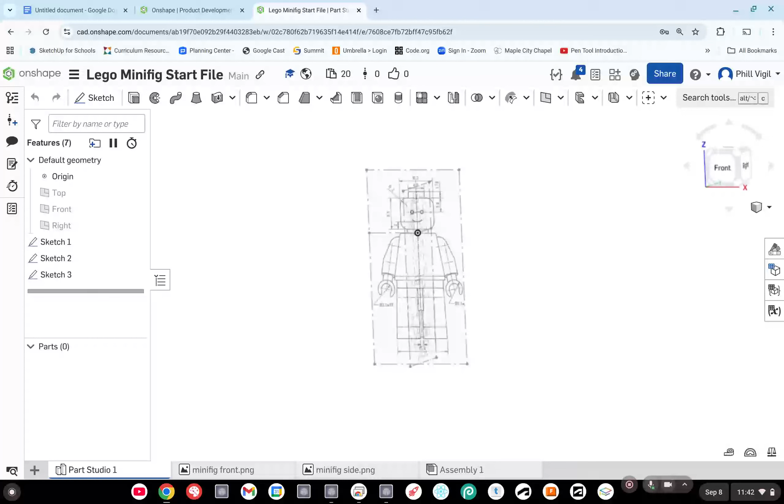Alright, so getting started with this, we're going to be modeling just the head of this Lego minifig. So this is the start file. You'll want to make a copy of this so you can edit it. So you're going to go here and click copy. Let's do copy 2 because I've done this before. And you need to choose a location to copy it to, so you may have probably just owned by me as an option.

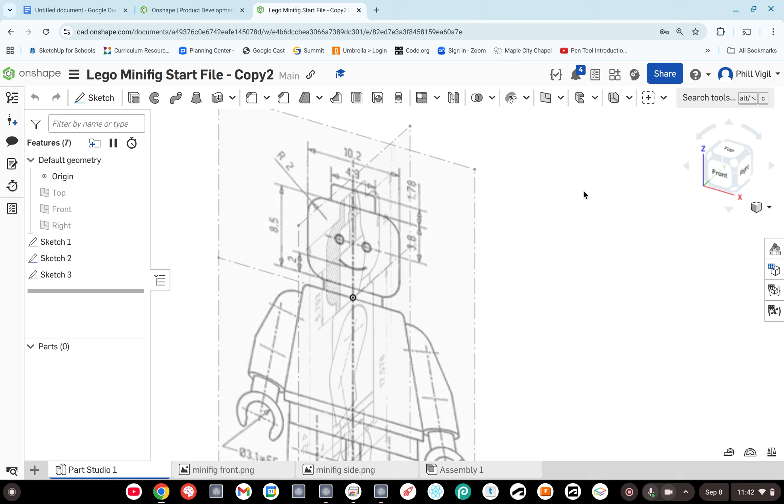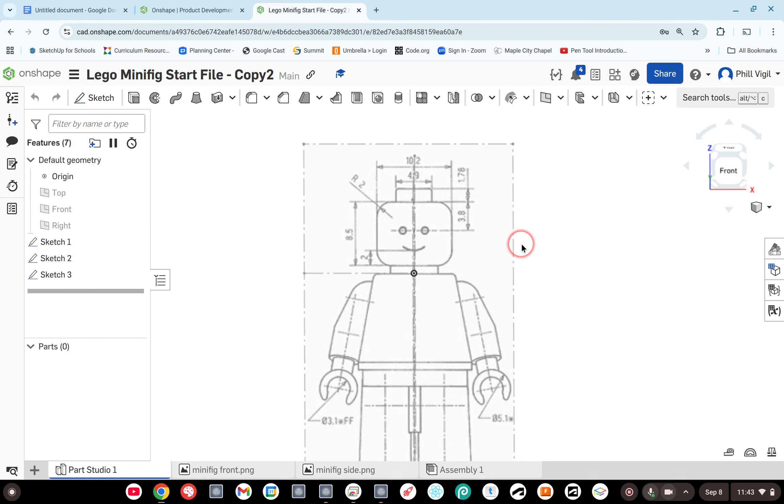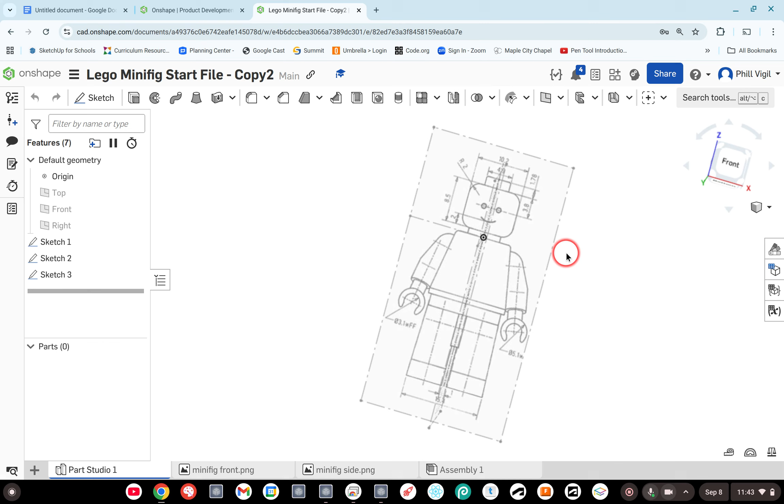So our goal is to model the head complete with a smile and two eyes here. So to get started, just to see what's going on, we have a diagram which is two images, one that has a facing forward minifig and then the side view, and I know that the side view is flipped, so don't worry about that. It's the only way I could import it. But we're going to use those for some measurements, and it is to scale, so as we make lines we can see that it pretty much matches up with the drawing space.

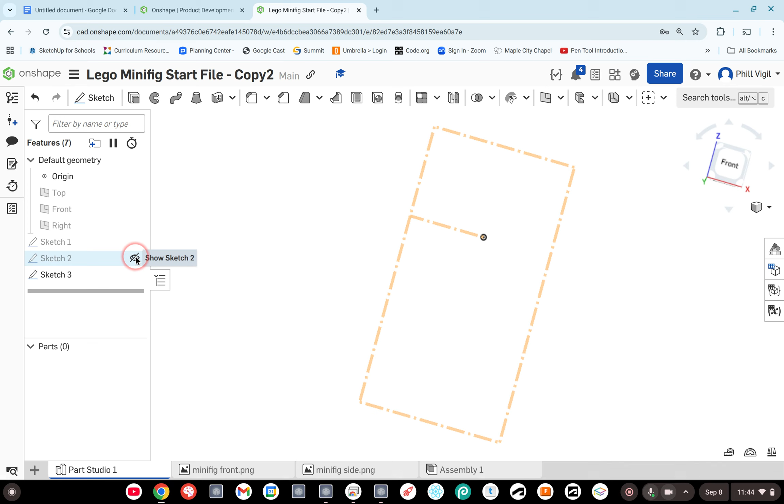So let's get started. So we're going to start on the front plane. We're going to create a sketch. So we already have a sketch in here that's extra that has nothing on it, sketch 3. Sketch 1 and sketch 2 have the images for the diagrams. So if you ever need to hide those, it's sketch 1 and sketch 2. Sketch 3 I just happen to include, which is blank, so I'm going to go ahead and double click on that. And it is set to sketch on the front plane, which is what we want.

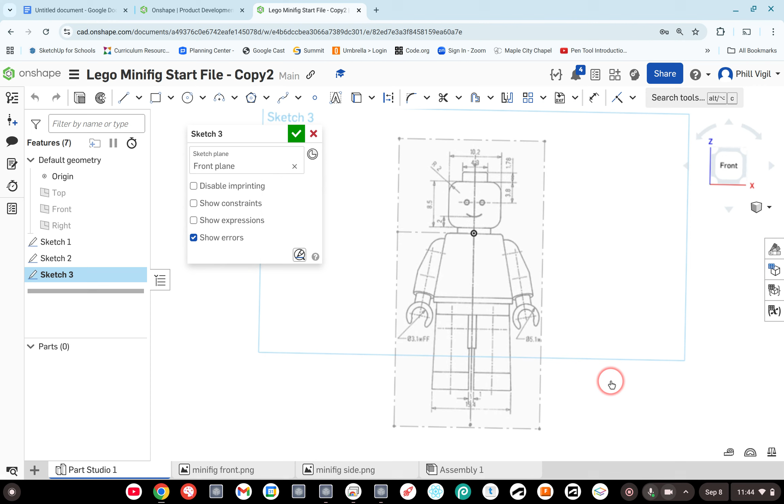So we're going to sketch on the front plane. I'm going to right click my view, my area here, and then select view normal to sketch plane. That's going to rotate it straight on there. And now we're ready to sketch.

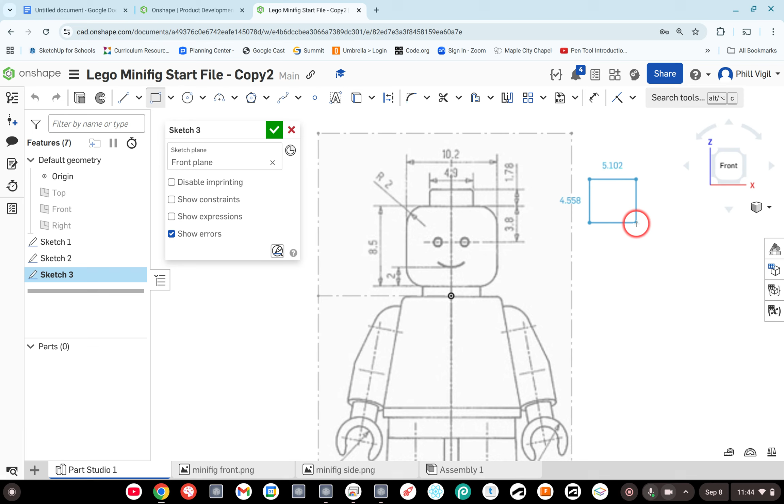So you can see from the diagram we have a basic rounded rectangle shape, and the measurements for that are 8.5 and 10.2. So I'm just going to quickly go through this. If you need to pause or rewind to get caught up, you can. But to get started, we're going to use this rectangle tool, and we're just going to click over here somewhere random, make a rectangle, and the next thing we're going to do is dimension it according to the measurements we have here. So, okay, one final tip.

If you create your rectangle, let me just show you the wrong thing to do. So in Onshape, there's tons of constraints. You can have a constraint and not even know about it, like if it's horizontally aligned with this point of origin, and you just click randomly to create your rectangle. Let's just say this is what happens, and then you go to dimension it. This is going to be fine here, 8.5, yada yada. And then the top is 10.2.

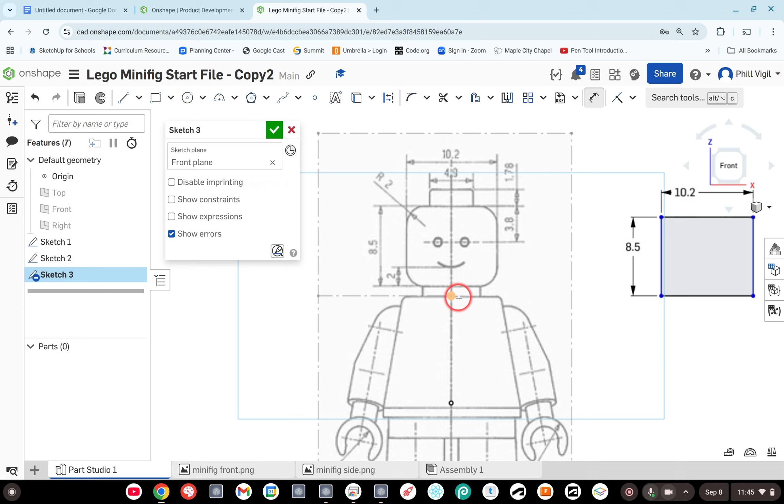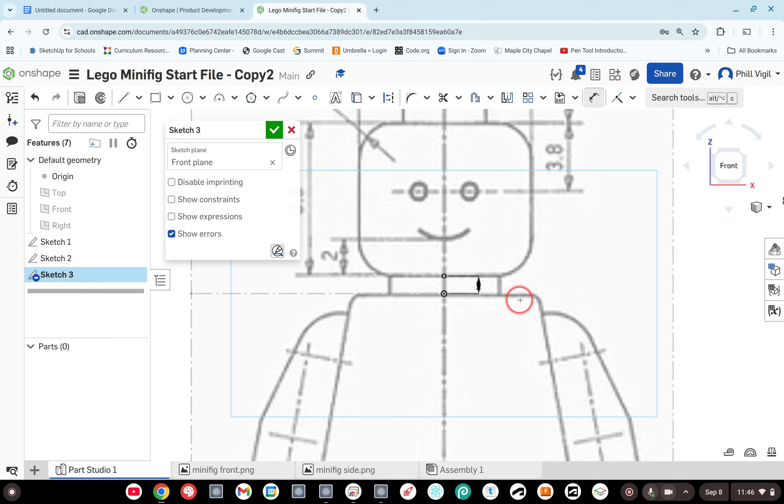And then I want to attach it here somewhere. So I'm going to need to make a point. That's the next part. And I want it to be right here. So I just create a little point there. Then I'm going to distance that. I'm going to measure the distance. Click from there to there. And this is going to be exactly 1 millimeter away. Okay, so this is going to be an anchor point for my rectangle.

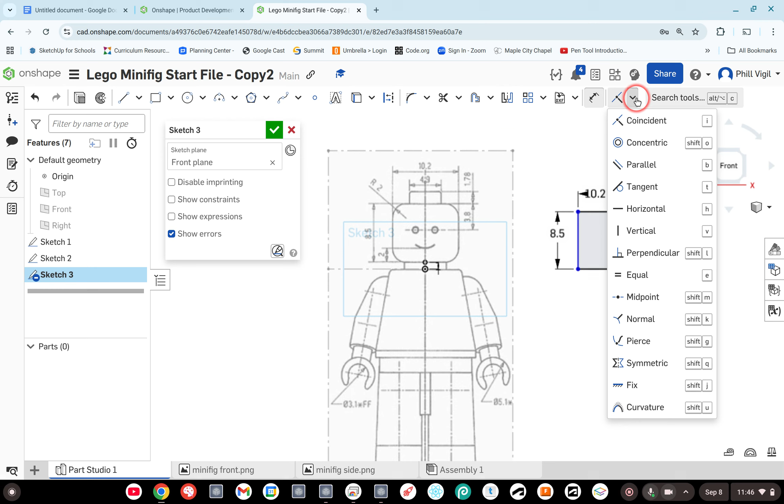And then let me show you what can happen if you accidentally add a constraint that you weren't aware of. So what I want to do next is I'm going to use the midpoint constraint. And if you have a larger screen, you may be seeing expanded tools. So these are actually up here somewhere. If not, just find the one that says coincident. That's one of your constraints. Click on the arrow next to it and you should be able to see this list of constraints. The one we're looking for is midpoint.

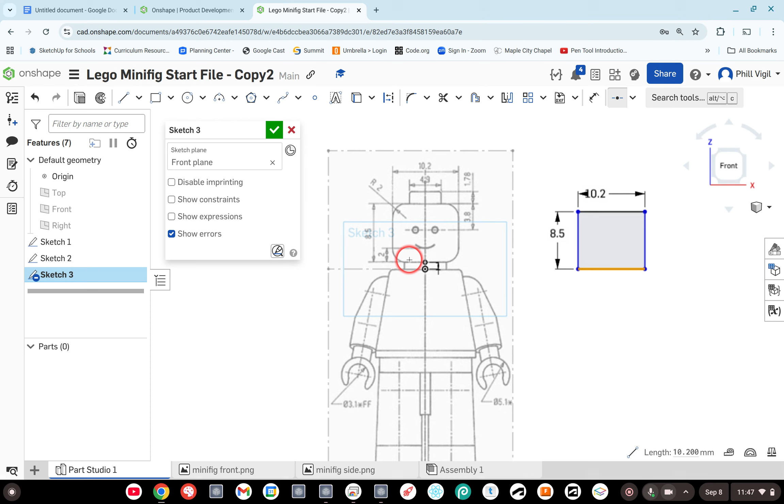So I'm going to click on that and then select the line, the bottom line. I want the midpoint of this line to be attached right here. So that would align our rectangle with the drawing. So when I click here, it's going to have an issue. It's because when I originally drew this, I referenced the point of origin.

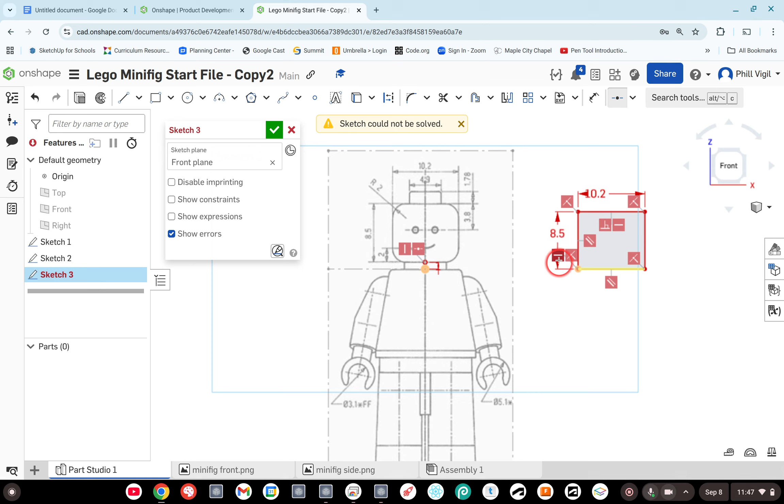And so this is now horizontally constrained, which means it cannot move up. It can't move here. And that's because it has this constraint. When I hold my mouse over it, you can see this dot lights up yellow, and then the line also turns yellow, which means those are the two elements that are horizontally constrained. So I can solve this problem by removing that constraint. So I'm going to click on it.

It doesn't really highlight very well, but it is selected, and I'm going to press backspace on my keyboard. Now that that constraint is gone, it is able to move where I want it to move. So if that happens in the future, if you get all that alarming red stuff happening, it's 99% of the time related to a constraint that you didn't know that you applied.

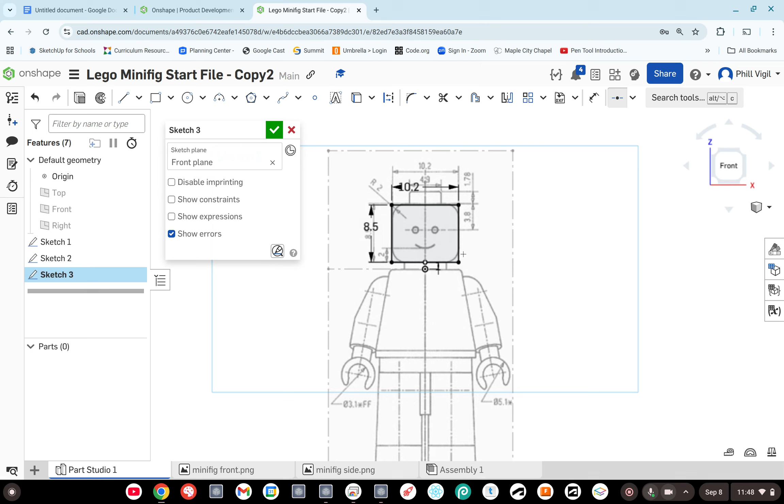So something is stuck together, like it's either tangent or parallel or vertical or horizontally aligned, and so you can't move it. So that just takes some practice getting to know how to avoid that and also how to fix it if it does happen. So if it happens to you, feel free to reach out with any questions. So now we're ready to move on. That took a long time to explain.

Next, we're going to round the rectangle angles here, and we can see the radius is 2. So for this, we're going to use this tool called the Fillet tool. And to use this tool, there's multiple ways. You could either click on corners to round them, or you can select 2 lines that are connected by a corner. So to me, it's easier to just click on the corner where they're attached.

It will immediately start to fillet that corner, and the measurement, you have to play around with this to see it change. So if I grab the arrow here and adjust it in and out, you can see there's a value that's changing. So for now, I'm just going to eyeball it so I can select the other corners. Whoops, I just clicked too many times. You can always go back in and do more corners if you want to, but it's easier if you do all of them at the same time. So let me go ahead and undo that step.

Grab the Fillet tool, and what you want to do is start selecting corners. Again, if you do this and only do one corner at a time, you can do that. You just have to set the measurement once, and that should duplicate the same setting with every other corner. See, I have 1.931 there. So I'm going to go ahead and click the next step.

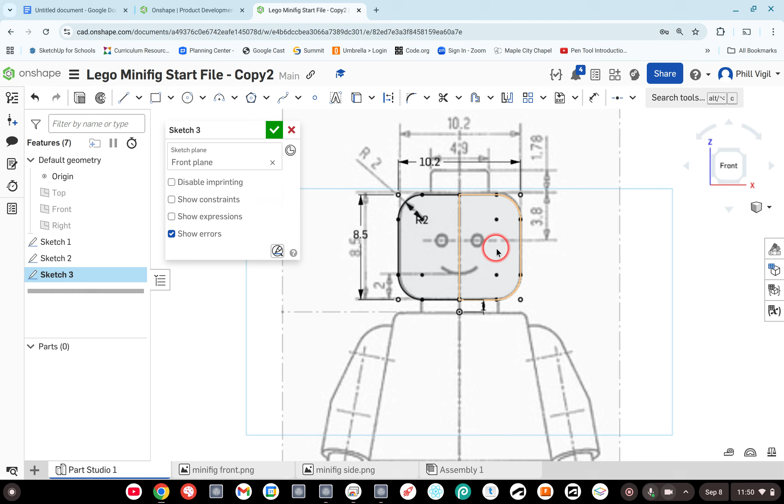So we're ready now to do the next step, which is we need to divide our space in half. So we're going to grab the line tool. This needs to be a real line, not a construction line. So I'm going to click at the bottom here and then draw a vertical line until it meets the top. It's going to divide my face in half. So now I'm ready to create my first part. So I'm going to click the check mark.

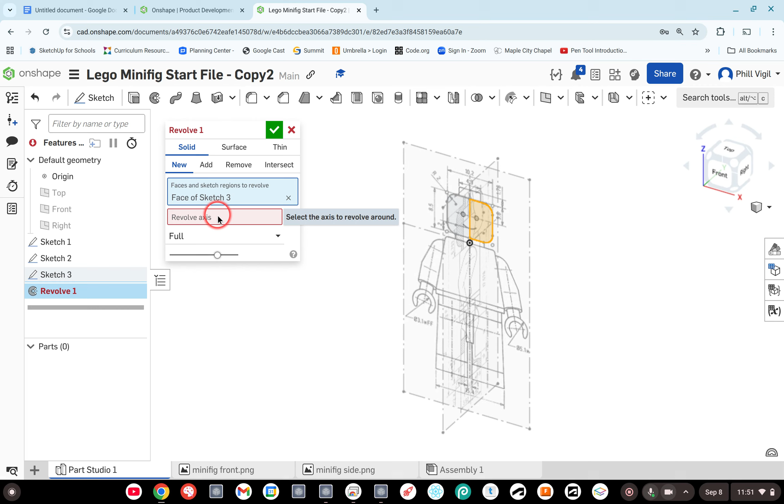And then to do this, we're going to use the Revolve tool. So I'm going to click on the Revolve tool, and then this box appears, and the first thing it wants is the faces or sketch regions to revolve. So you want to click on either half, doesn't matter. Click on the half. Then it needs to know the revolve axis. So what's going to happen is it's going to revolve this around this center axis.

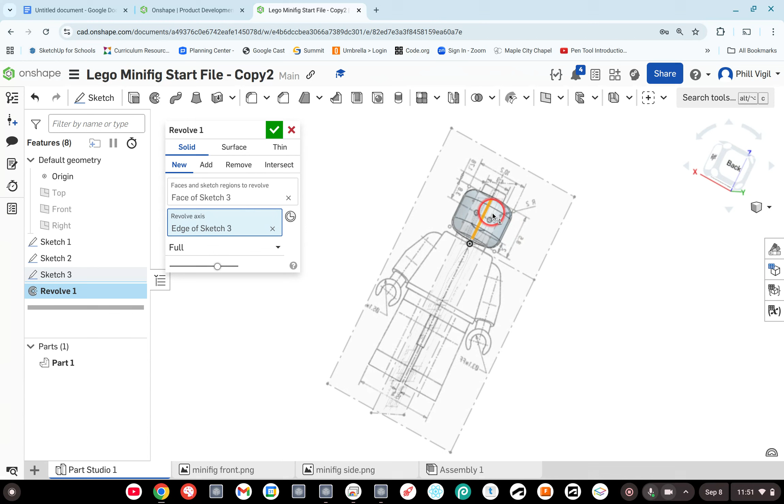So I'm going to go ahead and click in this reddish box there. Now I can select the revolve axis, which is the center line that we just created. And that should create the general shape of the head. Go ahead and click the check mark. And the next thing we're going to do is model the little nub at the top. That is a 4.9 millimeter circle.

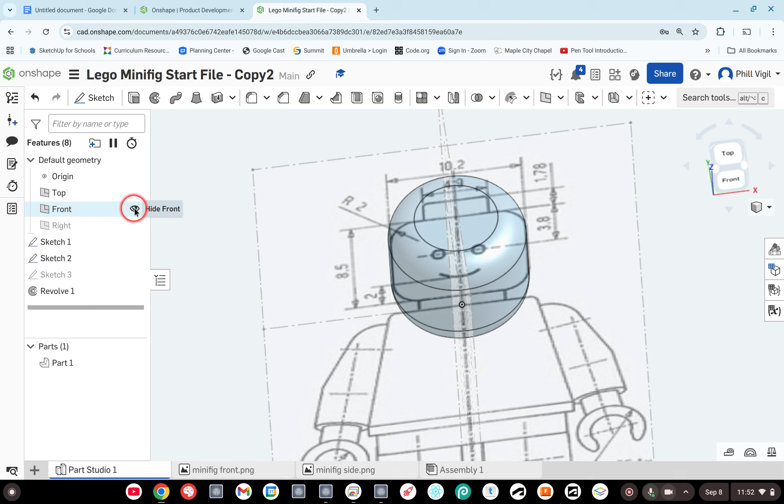So I'm just going to go ahead and hide the 2 sketches here so they're not confusing. Whoops, I just revealed the planes. Hide the sketches. So again, that was a 4.9 millimeter. So I'm going to view from the top now. Get a sketch. Make sure I'm sketching on the top of the head. So I'm going to just orbit to make sure that's on the top of the head. Yes, it is. And then we're ready to draw our circle.

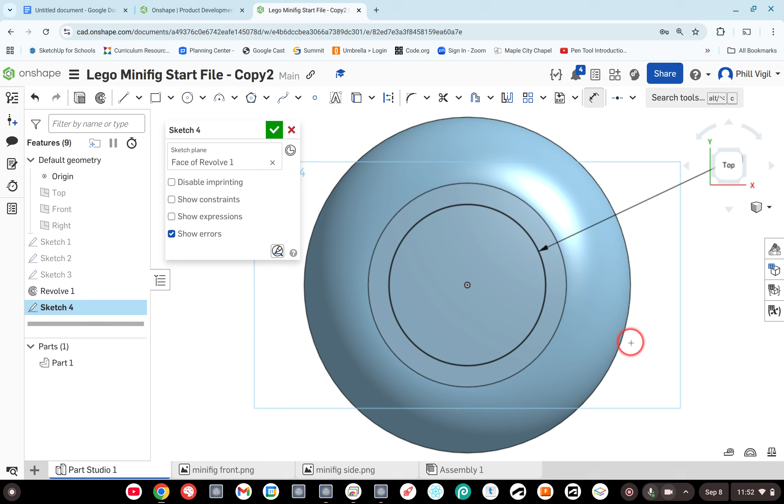So make sure you reference this point, which is referencing the point of origin, which is the center point. I'm going to click there, and then just click a random spot. Then we're going to dimension this to be specific. 4.9 millimeters, 4.9. Enter. Okay, now we're ready to extrude this. So go ahead and click the check mark.

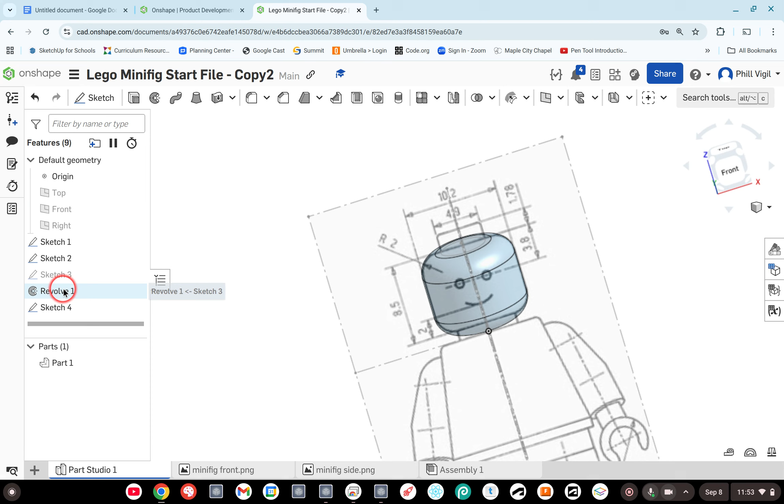And then we'll go into the sketch to see what the dimension is. I forget, so let's go ahead and orbit so we can see. 1.78. That's this measurement here. 1.78 is what we want. So go ahead and go into the extrude option. Click on your little circle there in the top. And then type in for the depth 1.78.

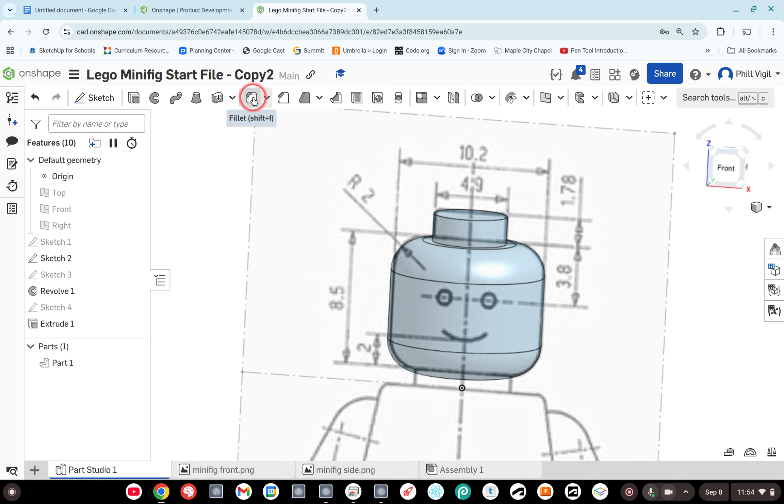All right, the next thing that we did in class, just a little something extra here. Let me hide this sketch. You can see if you zoom in here, the top of this is kind of like a beveled edge. It's got a rounded edge there. So we're just going to try to make that as realistic as we can. So we're going to use, in the 3D modeling tools, there's a fillet tool. Let's go ahead and find that.

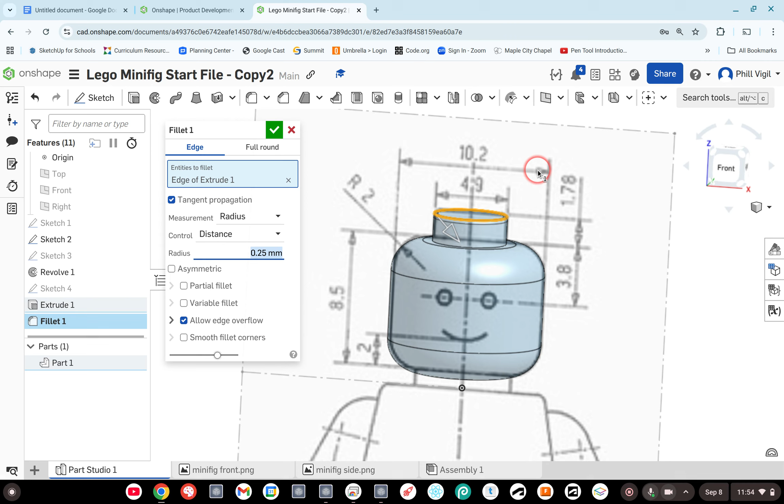And if I click this right now, it's going to remove the entire corner because the radius is 2 millimeters and my height is only 1.78. So it's basically taking the entire corner off. So we want to change this radius to something very small, like 0.25. So then we have a nice rounded edge there, and then click the check mark. All right, that's looking like our drawing.

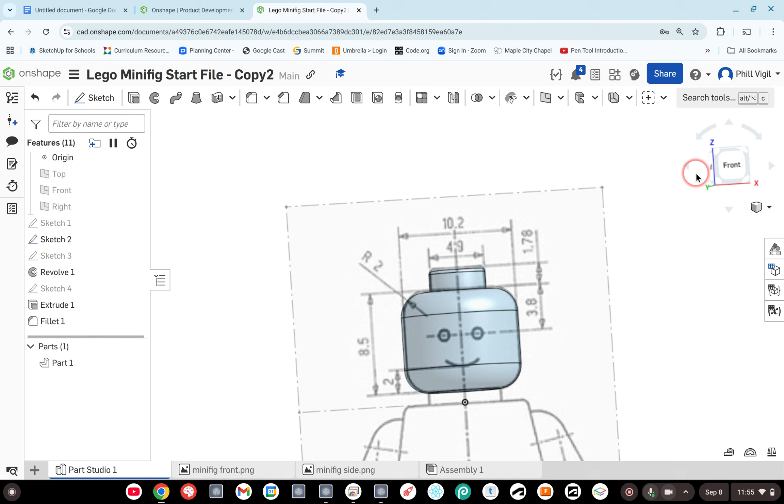Next, we're going to model the neck and make a hole for it to attach to a body. So the neck measurements aren't provided. There's no dimensions here, so we're going to use the line tool to get a general gist of what we're doing here. So let's go ahead and create a sketch. We're going to do it on the front plane, and if you want to, you could just watch this part. You don't have to really do it, but actually, let me just get out of this sketch. Sorry, it's a little confusing, but I only needed to reference the drawings.

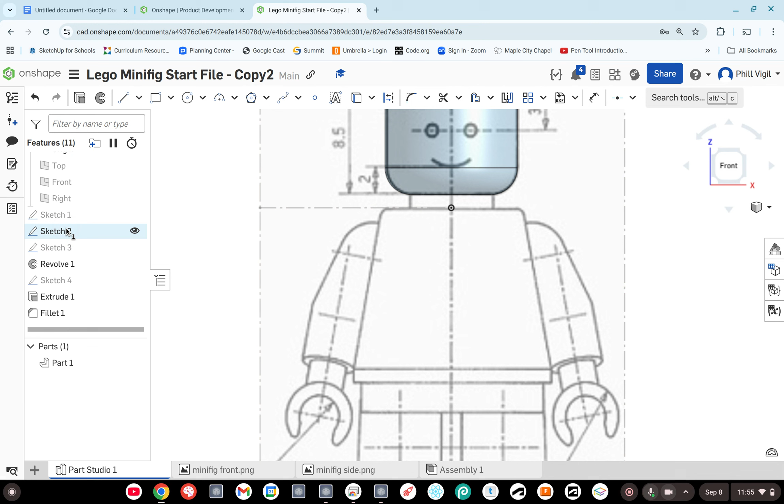I'm going to go into sketch 2 and just make a couple measurements here. All right, so what I need to know is the distance between the head and the body. So I'm going to go ahead and just grab a line tool and just measure real quick. Looks like it's about, oh yeah, it's 1 millimeter. That's what we had, the distance between here and there. So that's 1 millimeter. Let's just measure across here. We use a different line. Sorry, I'm just actively thinking in this video, so sorry you have to go through this process with me.

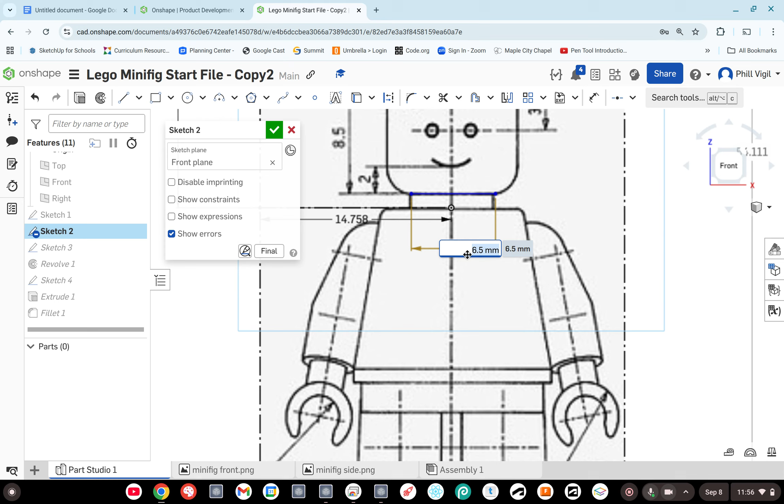So go ahead and click there and measure across to that side. Then we'll get the dimension tool just to see what we're working with. It says 6.33547. So let's do 6.5, or 6. Let's see what 6 looks like. It's a little small, so let's do 6.5. That looks a little large. Let's do 6.25. Okay, let's try that. All right, now we've got a measurement.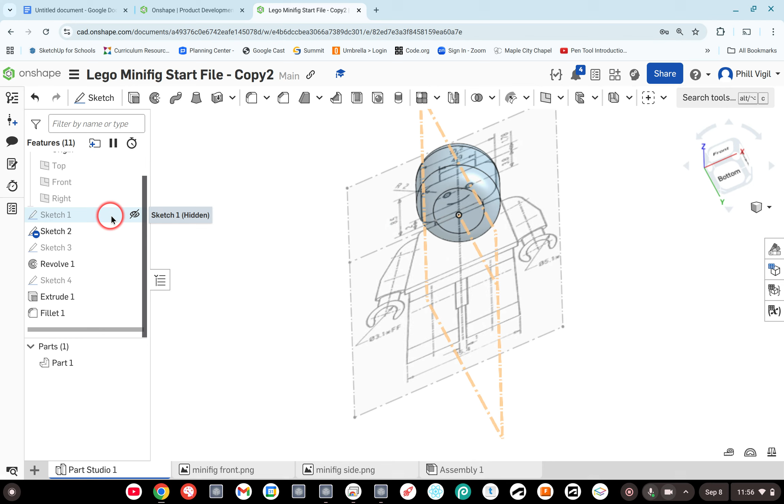We have a depth of 1 millimeter and a diameter of 6.25. So keep those things in mind. 6.25 is a hard one to remember. Go ahead and accept the sketch. Now let's orbit so we can see the bottom here. I'm going to go ahead and hide this sketch here. And then we're going to create a circle. So we need a sketch on the bottom. So we're on the underneath part of the head. Click on that to place your sketch.

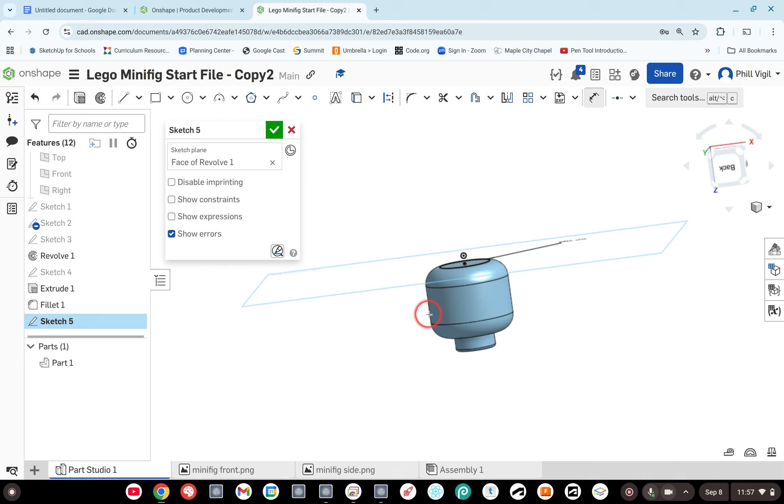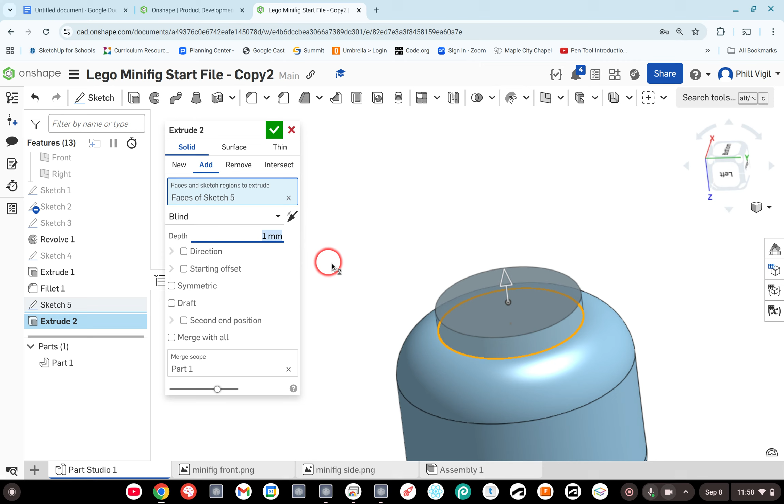Then we're going to sketch a circle. I'm going to orbit so I can see that I'm connecting it to the right spot. And then dimension this. It's supposed to be 6.25. I just wanted to see if that's sticking out beyond that curve area, but it doesn't look like it is. That looks almost perfect. Okay. We're going to leave it like that, and then we need to extrude this. And the depth is 1 millimeter. So we've got the basic shape here.

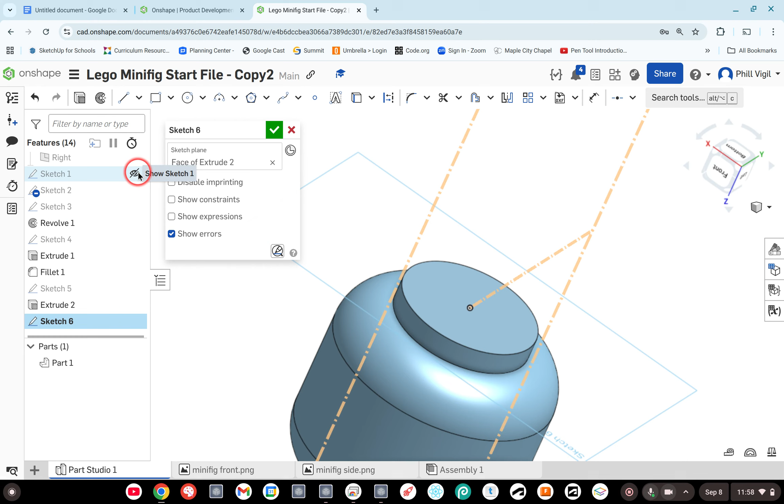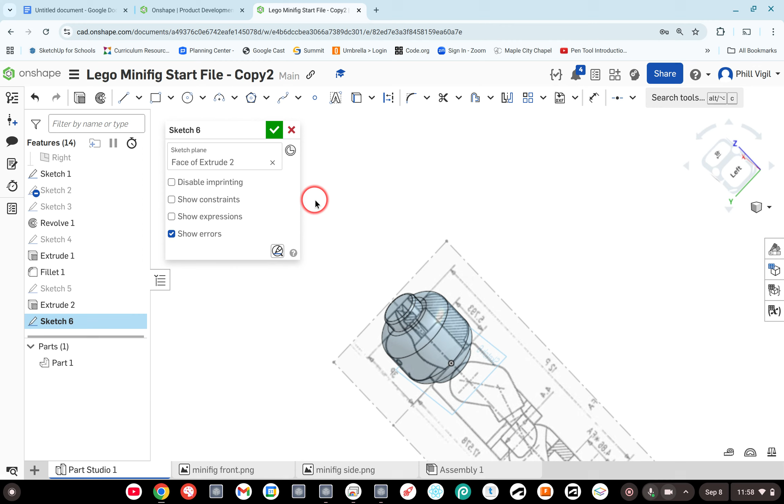Click the check mark. Now we need to make another circle, so I'm going to sketch on this plane. And let's see. The hole on the sketch 1, if you see, almost all of the holes that you see are this 4.86 measurement. You see that there, where there would be a hole, and down here, 4.86. So I'm just going to use that measurement for now, and it may need to be adjusted later, but we're going to use that 4.86. Let's just round it to 4.8. That's easier to remember.

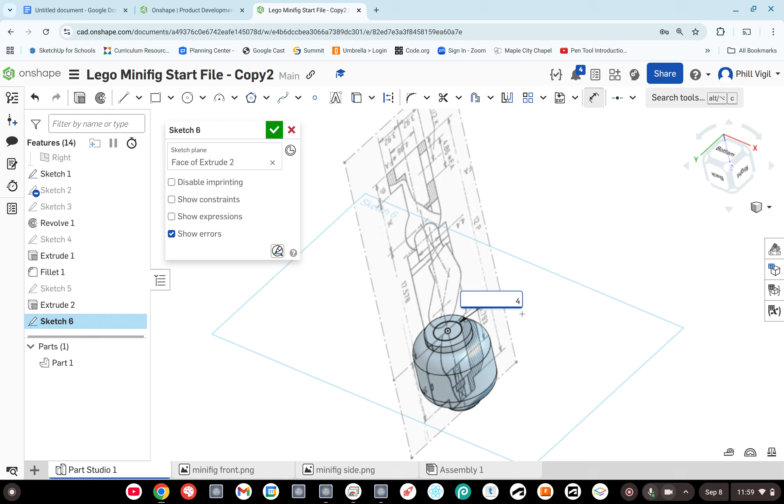So now I need to get back in and start a new sketch. This is my sketch 6. And we're going to draw a circle that is 4.8. Draw the circle and then dimension it. 4.8. Okay, and then I'm just going to hide the other sketches for now. They're just in the way here. All right, we're done with the sketch.

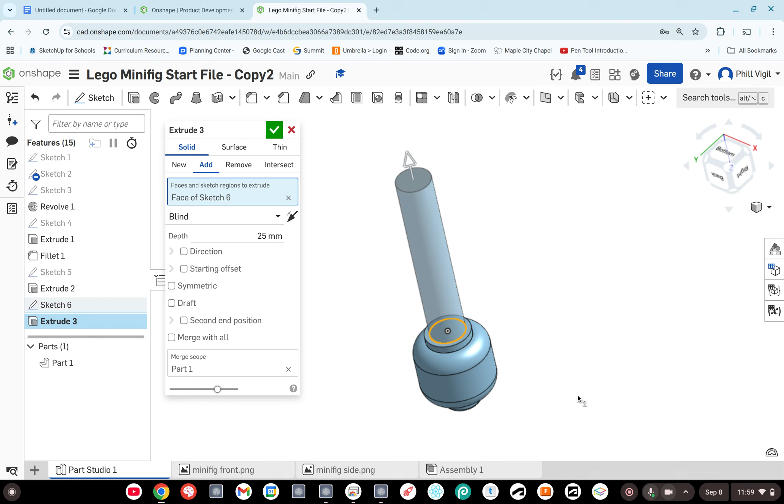Now we're going to extrude, and we want to use this cylinder to remove a cavity in the head so it can attach the body. So we need to switch this to remove, which if you orbit, you can see this putting a hole all the way through it, which we don't want to do. So we need the depth, which is found in one of the sketches. So I'm going to have to turn that sketch back on.

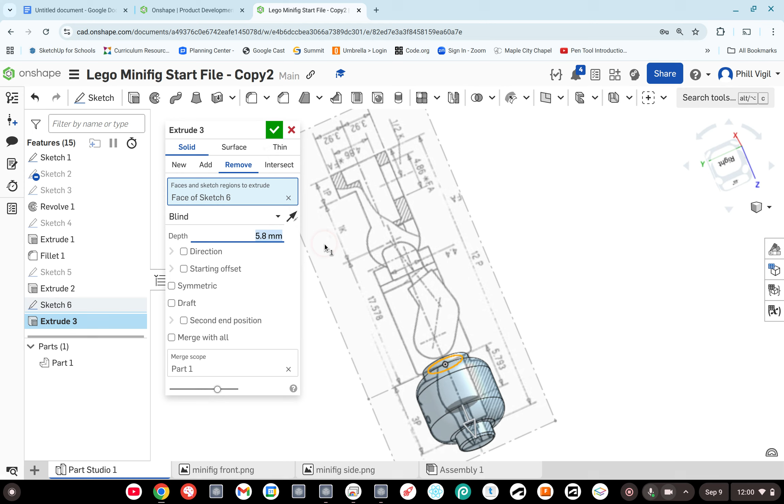So in here you can see there's a measurement, and we're backwards. So let me orbit around. Looks like 5.79, so let's do 5.8, just as a nice round number. So we're going to extrude this 5.8. Again, this is removing material, so it's somewhere inside. Go ahead and click the check mark.

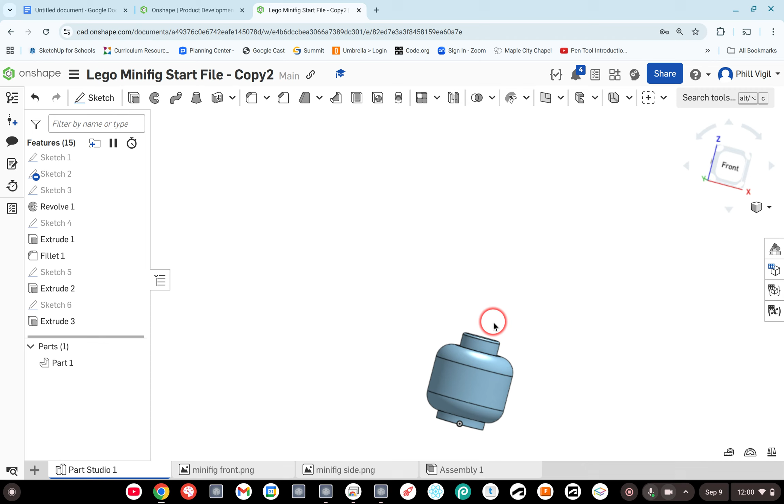I'm going to go ahead and hide the sketches so you can see what this should look like. Orbit around. So you see there's now a spot for this to attach to a Lego minifig body. So we've got the general head shape. So the last thing we're going to do is focus on the face. So to do that, I'm going to reveal sketch 2 again. And we have this nice smiley face here.

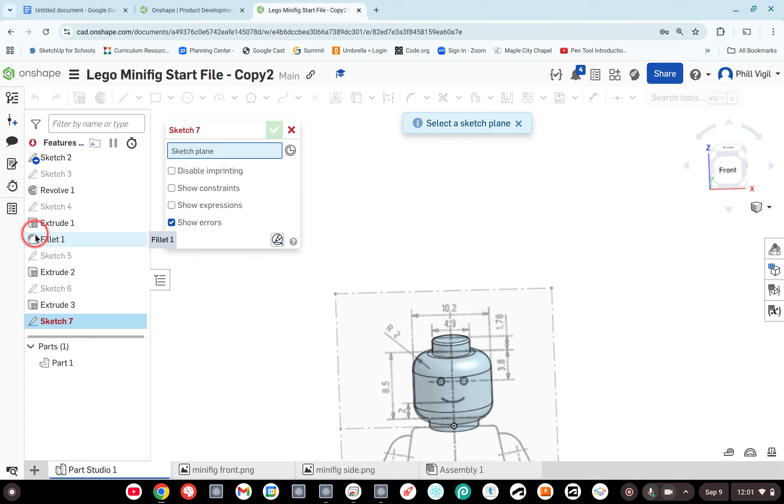And I forget which side it ends up on, but we're going to go ahead and sketch looking at the front. So I'm going to go ahead and start a new sketch for my face things. Choose the front plane. So now you can't see your planes because we're towards the bottom here of all your elements. So if you need to scroll to the top, you can see the option for top, front, and right. Or you can reveal your planes by clicking on the P key on your keyboard.

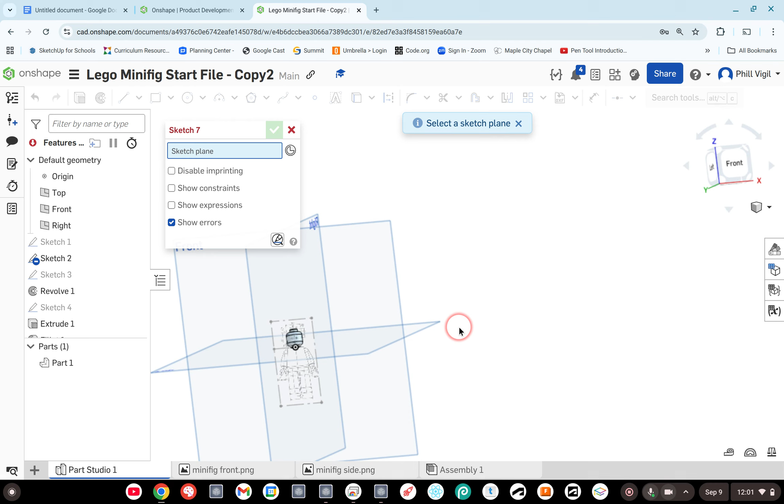Click zoom out so you know what you're looking at here. But we want to sketch on the front plane. So now I can select it here because it's revealed, or I can select it over here at any time. So just click there. Now you should see front plane as your sketch plane. I'm going to go ahead and right click, view normal to sketch plane. It's just going to rotate it there in place.

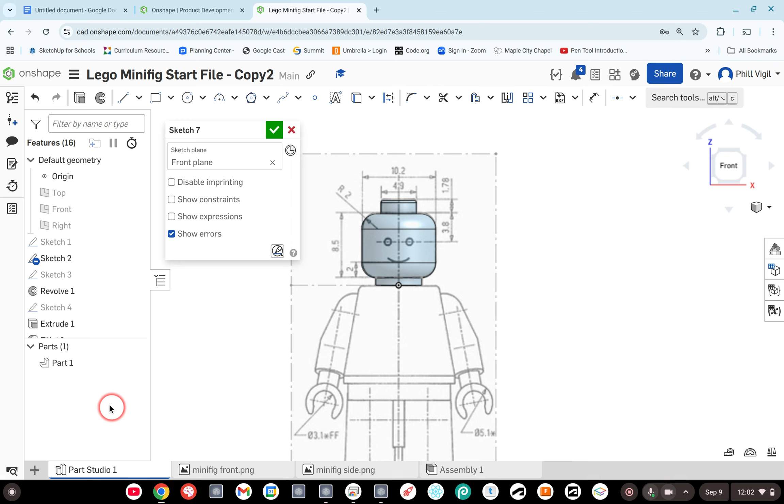Zoom in to where the face should be, and I'm going to hide my part. That's just my solid there. And you can see there's some measurements here that are going to be helpful. So we're going to start by creating some guidelines. We've got the center line here. Let me see if this does anything. I'm going to go ahead and attach a construction line. So again, enable the line tool and construction option. I'm going to click on the point of origin and just make a vertical line straight through the top here. It doesn't matter how long.

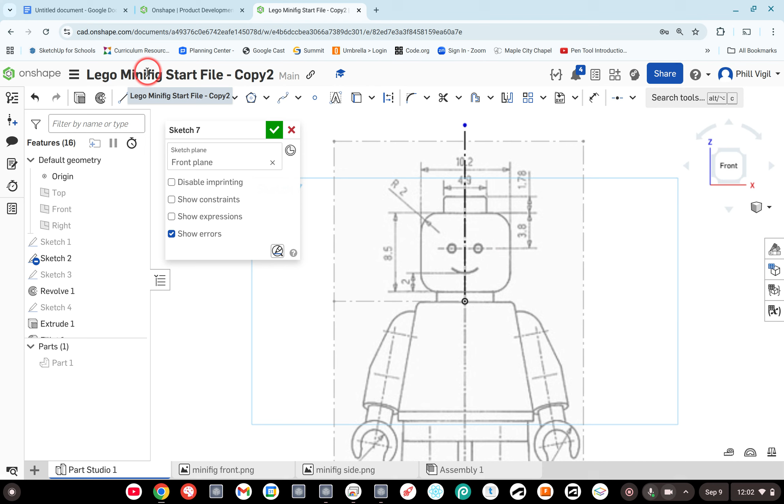All right, and then we have another guideline here. So I'm going to go ahead and model that. It just needs to be horizontal. So I'm going to click over here and make sure it's horizontal. For some reason it's parallel to the top instead of horizontal. That's fine. Same difference. Okay, and then we have a distance from here to the top of where the head would be, and I don't have anything.

This is just an image, so I'm going to turn on sketch 1 so I can reference. It's not sketch 1, it's sketch 3, sorry. Sketch 3 has our rounded rectangle. So it's supposed to be 3.8 millimeters from the top of the head there. So let's go ahead and get the dimension tool out. We're going to click this line and then click on the top line. That's going to give us this measurement here. Now I'm just going to click to place the measurement, and the distance should be 3.8.

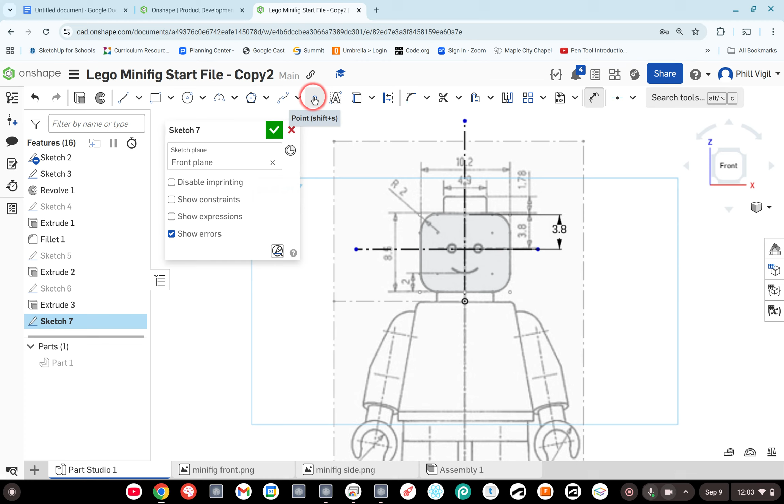All right. Then we have another measurement here, which is 2 millimeters away from this dot. So I'm going to use just a dot. So I'm going to add a point right here where the smile should be. And then I'm going to dimension that 2 millimeters away from the other dot that we created right here on the chin. That should be 2. Okay, now we're ready to start modeling some things.

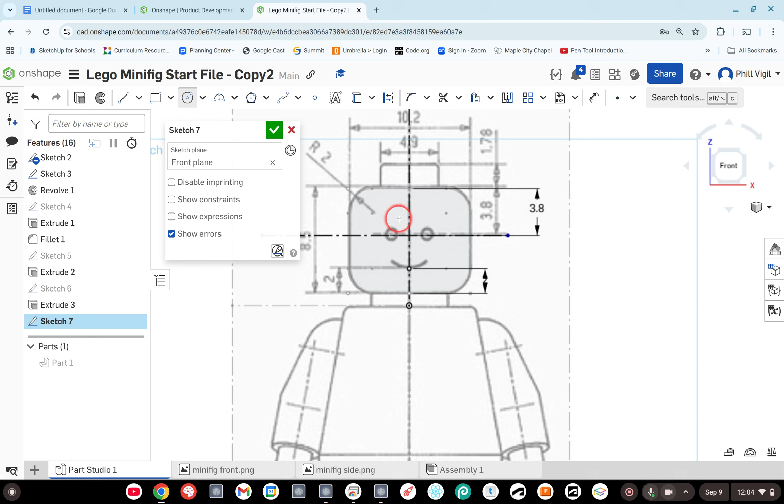I'm going to create a circle. So I'm going to grab the circle tool. And this is going to be somewhere around here, attached to that guideline, a construction line, and then I'm just going to click to place it. And I think the measurement for the diameter should be around 1 millimeter. Then go ahead and just grab the dimension tool there, and let me type in 1. It's about 1 millimeter, maybe a little more.

1 looks good though. So if you want the exact placement from this line to that line, you could dimension that. It's not in the drawing anywhere, but I'm going to use the dimension tool to get a measurement between one eyeball and the center line here. That looks about 1.5. So let's do 1.5, enter.

Now, I could go through that whole process to create my other eye, or I can just simply mirror this eye on the other side. So we're going to learn how to use the mirror tool. The mirror tool is up here. Find the mirror tool, click on it. The first thing it's saying is to select a mirror line. That would be our center line here.

Now that we've selected the center line, now we want to select the entities to be mirrored. So anything that I click on will be mirrored on the other side of that line. So I'm going to click on my eyeball, and just like that, I have my second eyeball. I'm done with the mirror tool, so you can press escape to get out of the tool.

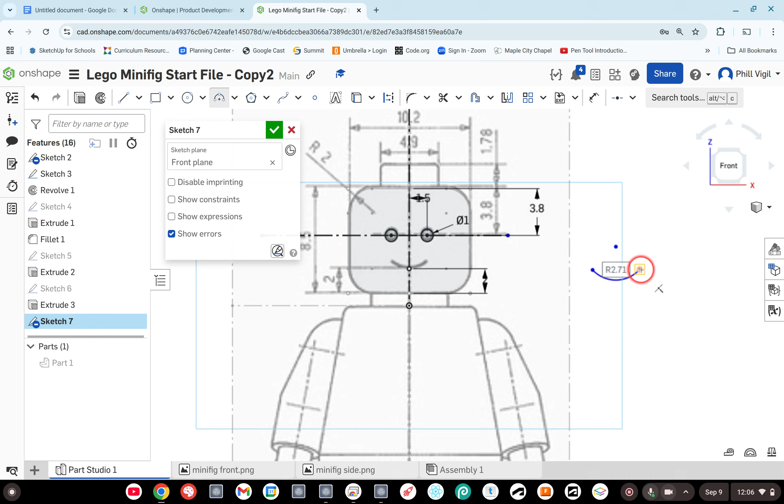In this case, we want a horizontal arc there. The 2 points are horizontally aligned. Then this is just the direction of the curve and the radius. So you get a radius that you like and then click. Then you've made your 3-point arc. These 2 dots need to be horizontally constrained. So you could either create a line.

Let's do that. Let's create a construction line. That's going to allow us to have a center point and make sure that they're aligned perfectly horizontal. So I'm going to go ahead and grab the line and then enable construction. I'm going to go ahead and click from one point to the other. And then I want to make sure that this is horizontal.

So before I do that, let me just show you. I'm going to purposely make it at an angle. Okay, so this obviously is not horizontal. So let me go into the horizontal constraint, click on that, and then click on this line. That's going to force it to be horizontal. So that's one step. The next step I need to do is to find the center point on this line.

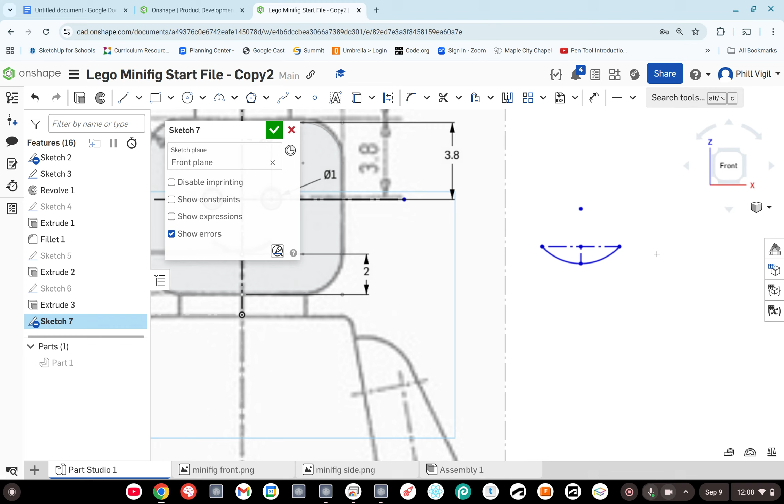So if I grab the line tool again, find construction, and find the midpoint of this line, there's a constraint there. I'm going to click to attach it right there, and then straight down or vertically, I'm going to click to attach it to my arc. So you can see, if you're thinking logically through the process here, all this work has created an arc that is perfectly horizontal and has created an attachment point right here for my smile to attach.

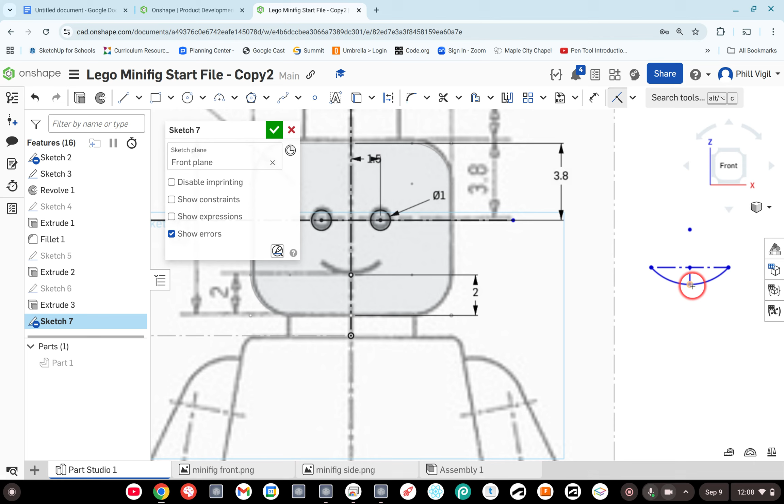So the next step would be to make this dot and this dot coincident. So in my constraints, the first constraint there is called coincident. So I'm going to go ahead and select that, and then I'm going to click on the two dots. So this dot here, which is the midpoint of my arc, and this point here. And it should attach right there.

So the next things you could do to fine-tune this smile would be, you could determine the length of the arc. So this would determine the length of the arc. So I can go ahead and dimension that. If I wanted it to be exactly 3, I could type in 3.

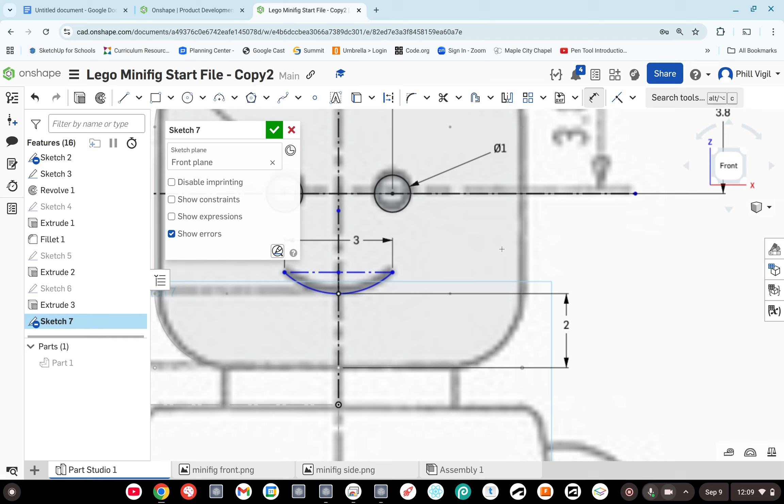And then the other thing you can determine is the radius, which this radius looks really good. I'm going to go ahead and just dimension this so you can see what it is. If you want a nice round number, maybe 2.5. Let's see what that looks like. That doesn't look too shabby. I'm going to go with that.

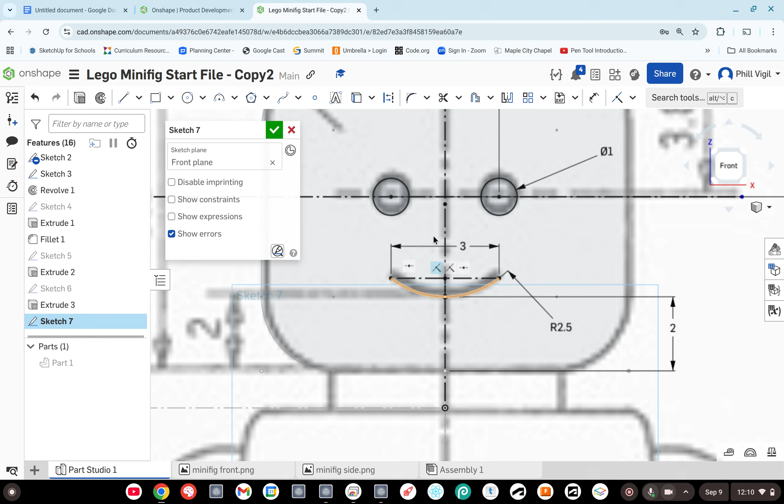All right. So it may look like we have eyes and a smile, but these two eyes have regions that can be extruded, but the smile is just a line. It's not a region. So we need to somehow create a smile that has a region to it, not just a line. So to do that, we're going to offset this line. So we're practicing using another tool. This is the offset tool. Go ahead and find it and select it.

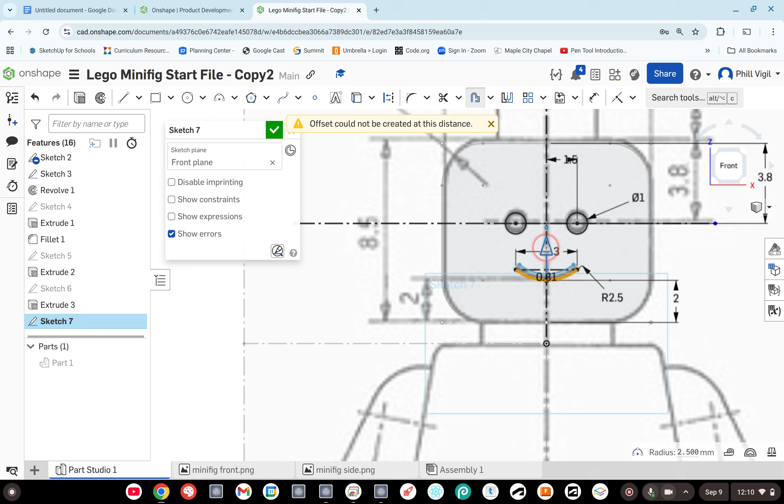And we're going to click on our line, and it's offsetting. Looks like 5 millimeters away, which is way too far away. So first it's in the wrong direction and it's too far away. So if it's in the wrong direction, just click on the arrow. It's going to reverse the direction. And then I can pull it in until it makes sense. Looks like about a 0.25 millimeter gap.

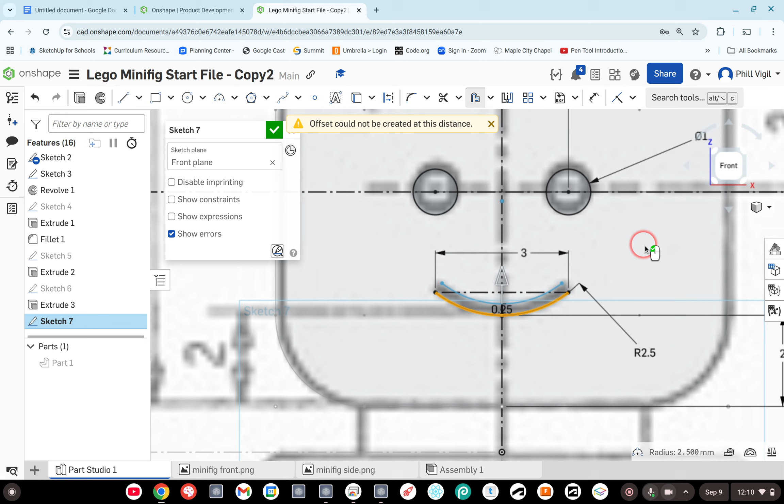So after you choose the direction of the offset, the next step would just be to click to accept the offset items. I'm just offsetting one arc. So I'm going to go ahead and click. And then the next thing would be to add the dimension, which would be the distance between the offset. So the offset is 0.25 millimeters. I'm going to go ahead and accept that measurement.

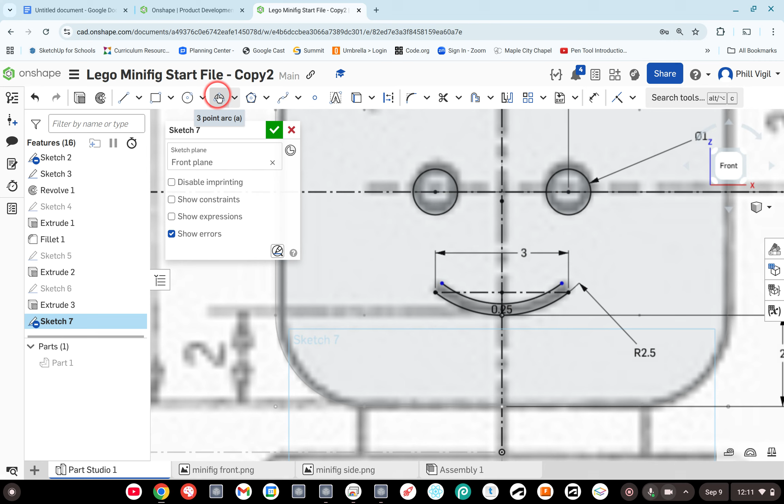Now this is still not an enclosed region. There's an opening on either side. So we need to close that in with an arc on each side. So I'm going to grab the 3-point arc again. I'm going to zoom in because we're working with really small measurements right now. I'm going to connect the two dots with my arc. And then I'm going to go ahead and zoom in some more. When you get to a perfect measurement, it kind of snaps to be a perfect arc. It's 0.125, it looks like.

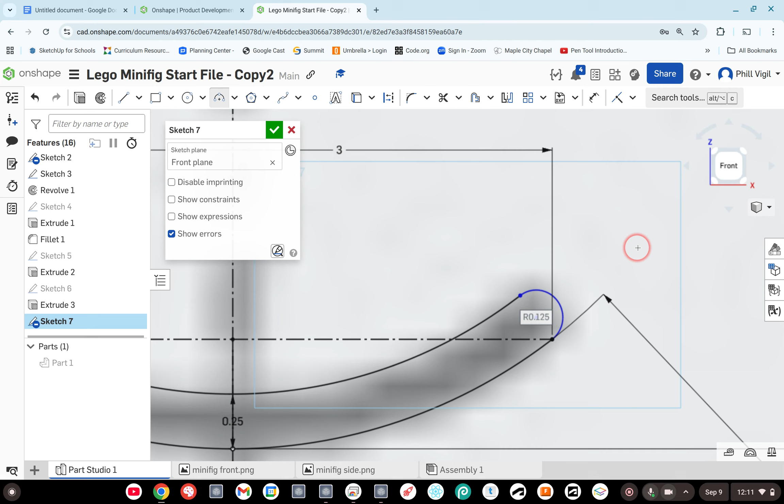That's the diameter or radius, the radius of the arc. It's 0.125 - if you're using the same measurements as me, 0.125 would be the radius for that arc.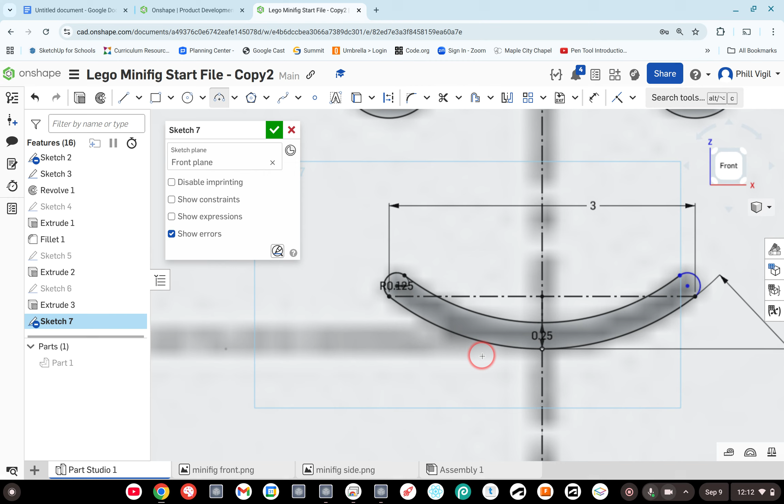Now we're going to go ahead and do the other arc here. Click and accept it. So now it looks like for some reason this is not fully defined, but we're not going to worry about that right now.

Go ahead and click the check mark. It looks like I have a region here, maybe. We're going to find out in just a second. If there are any openings, the next step is not going to work, so it needs to be a completely closed region. Let's see what happens next.

So for the next feature, we need to use a special tool. It's called the wrap tool, and there are two parts to this. You need to select the things that you want to have wrapped, which obviously are the eyes and the mouth elements. And then you need to select the surface that you want them to be wrapped around.

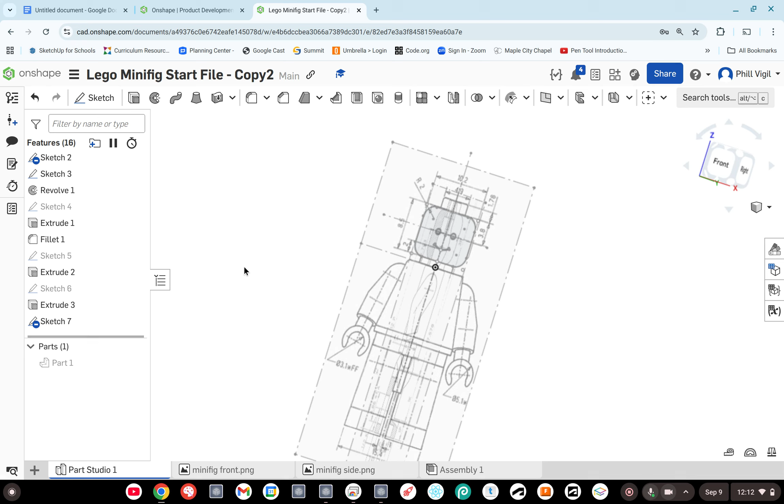So before we reveal our parts, we need to select our items. So we're going to find the tool first, and I believe it's found - let's see, I think it's where the plane tool is. Nope. There it is. It's where the Boolean tool is.

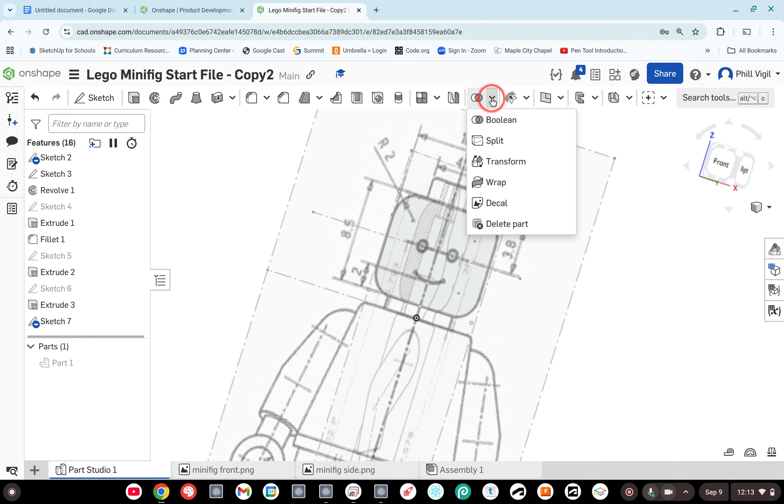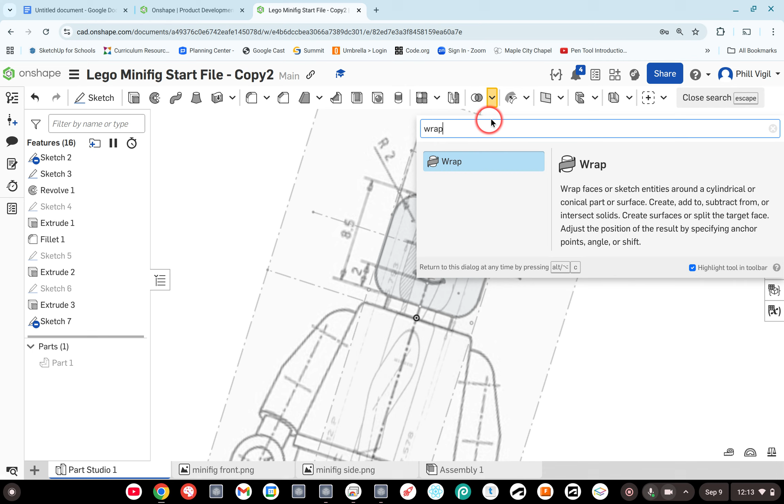So find the Boolean tool, or it may be expanded out into your tool set. I'm not sure, but it's hidden in most screens unless you have a large screen. So find the Boolean tool and click the arrow, and there should be wrap. If it doesn't show up there, or you have a hard time finding a tool, feel free to use the search, search for wrap, and it will show up here. It'll actually show you where it's found too - it'll highlight in yellow the location.

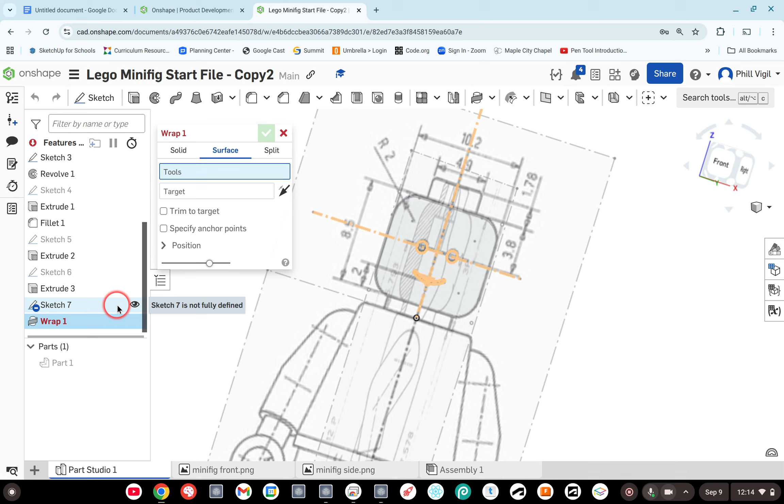So I'm going to select the wrap tool. That opens this dialog box, and we want to select the tools, which would be the regions that we just drew in our sketch. You may need to hide any other sketches that are getting in the way. So that was sketch 7, and I have sketch 3 still on, and I have sketch 1 and 2 on. So I'm just going to hide those, and focus in on these three things.

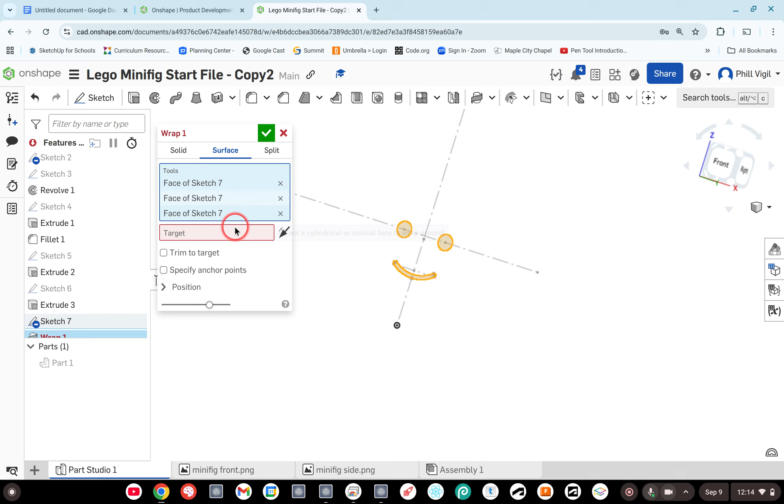I'm going to select the 2 eyeballs and the mouth. So you should have those 3 selected as elements there. Now I'm going to click on target, and the target is part of my part. So I'm going to reveal my part, and I want it to be on this surface here. So I'm going to go ahead and click.

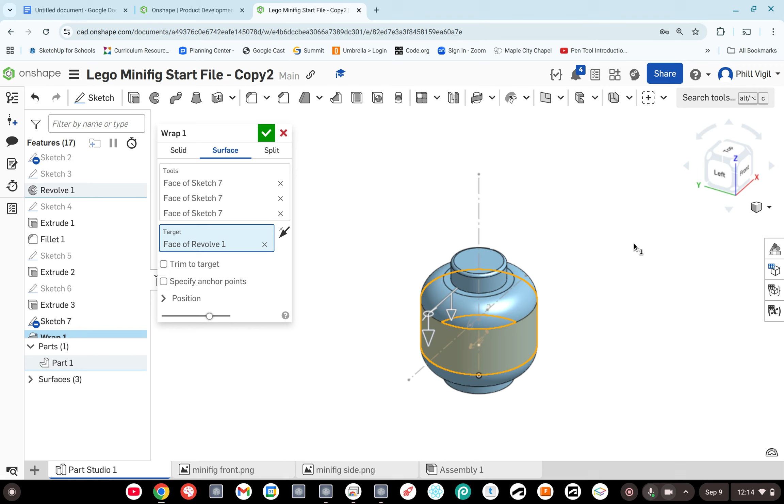And for some reason it attaches to the back. So this happened in class too, so don't worry about that. You may need to orbit around to see what's going on here. So there are the elements, they're selected.

And right now they are, for some reason, set to surface, but I want to extrude these as solids. Switch to solid, and you should see this strange thing happen - it's extruding out as if it was attached to the surface. So this extrusion is too much.

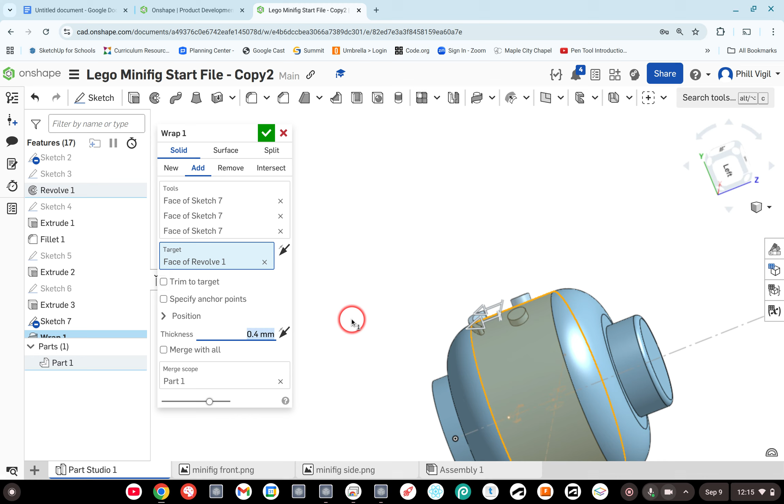So we're going to reduce the thickness to something like 0.4 millimeters. Maybe even less than that. Let's do 0.25.

Okay, so you just have a little bump out there. And I prefer to have this be an inset instead of a bump out, so I'll show you the difference, and you can decide what you like. So instead of add, if you change to remove, it's going to indent the solid instead of have it stick out, which I think just looks a little bit better.

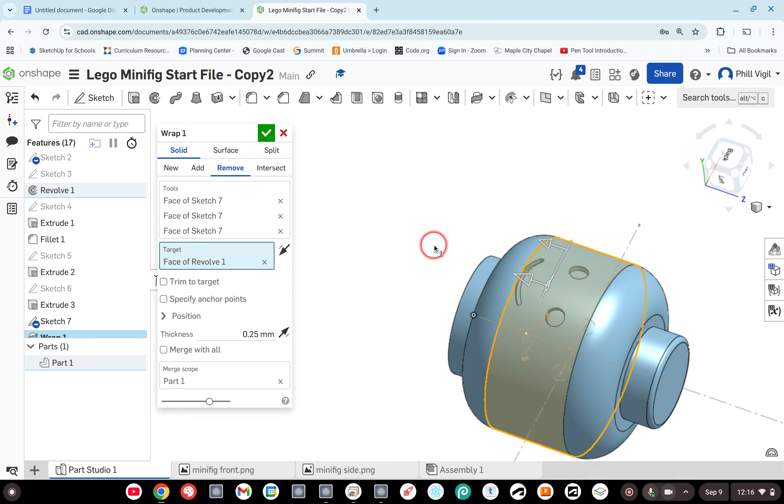So I'm going to go ahead and click on the check mark, and you can see your finished product. Zoom out so we can see our little head here. That is the end of this lesson.

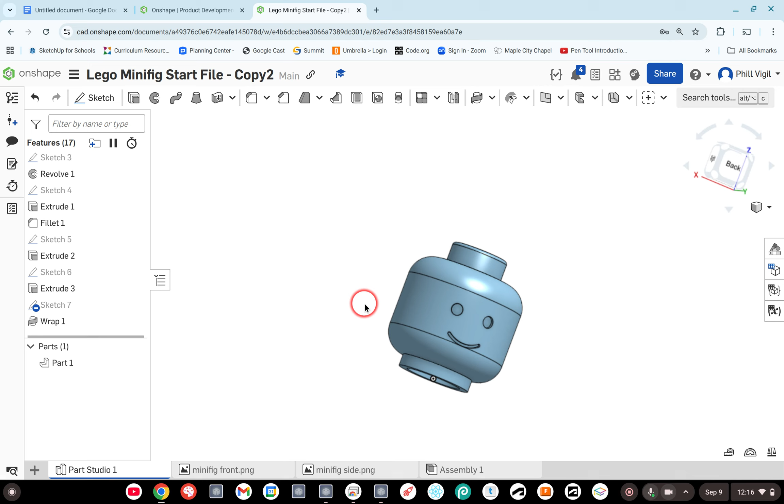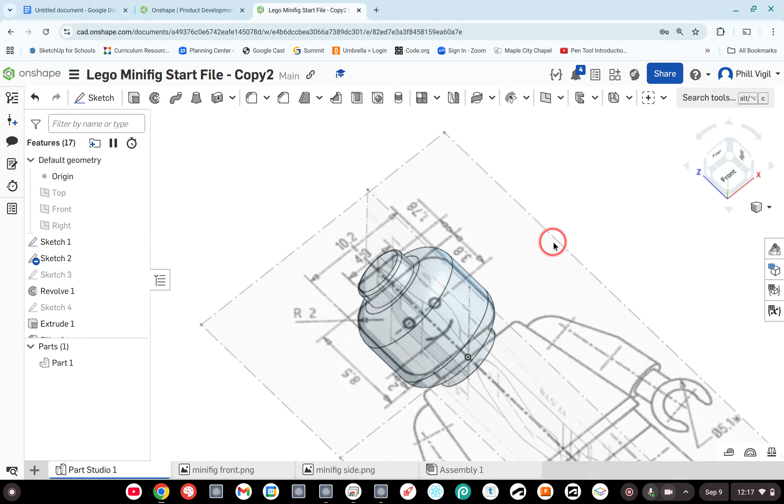If you are an advanced CAD student in the classroom, I challenge you to create more elements. So if you finish this really quickly, take a look at sketches 1 and 2, which have our diagrams on here. And you could choose a couple more elements to try to model, like the hands, or if you want to try to do the main part of the body here, you could do that. Or more advanced shapes would be like the arms and the legs, which we don't have very many dimensions on how this actually functions, but you could just model the basic shapes. Again, the point is to just get familiar with a variety of tools and have fun doing it. So that's it.